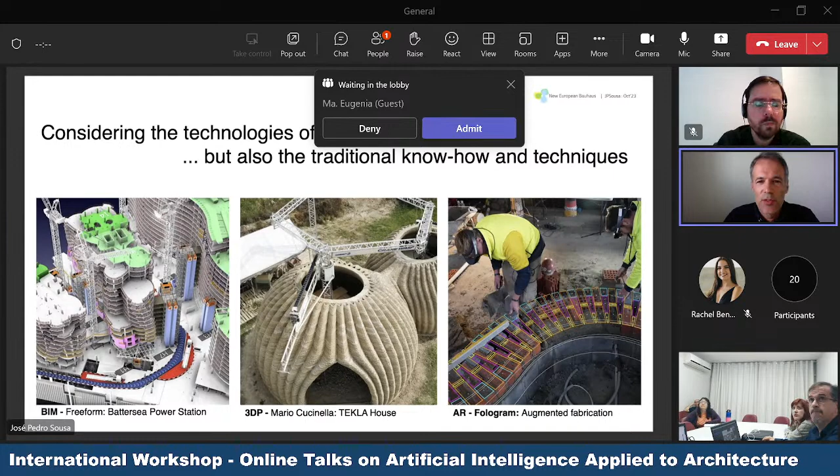Looking into how this school, founded almost 100 years ago, can inspire our actions today, we can see that, like then, we should consider the technologies of our time to help us, but not just those emerging technologies. We should also look into traditional know-how and traditional techniques and find efficient ways to combine them.

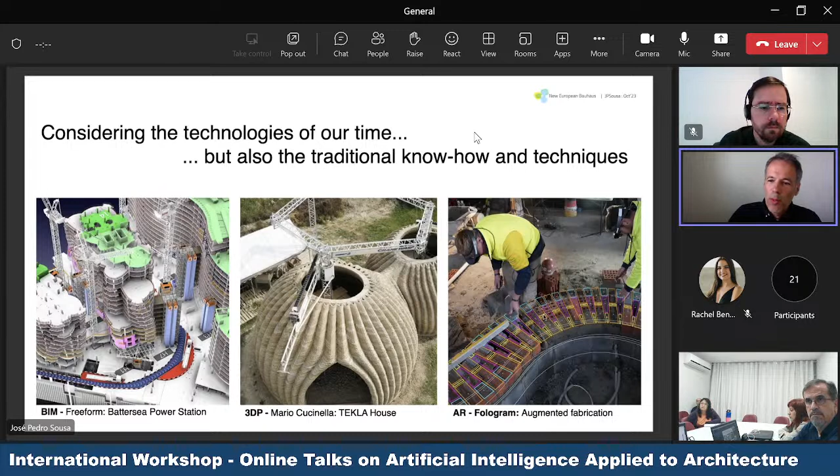Today we have building information modeling, reframing collaboration in our industry. We have technologies like 3D printing that allow us to use only the material needed to produce these kinds of structures. We also have augmented reality technologies where we can expand manual and traditional crafts into more complex and flexible conditions.

There are also other technologies here today to be learned, explored, and examined, and those are part of the workshops that Igor is running. That's artificial intelligence, and we see artificial intelligence used to think about ideas, but also to consider and evaluate a myriad of possibilities when designing our buildings, following different criteria that can be environmental, economic, etc.

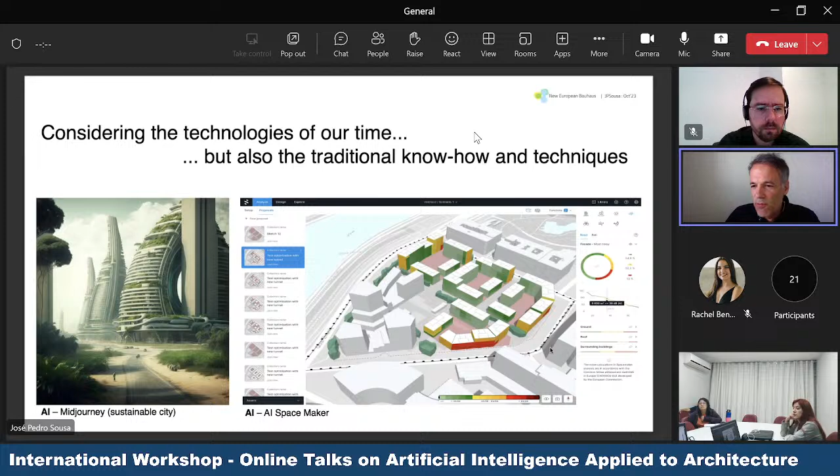Unlike in the Bauhaus time, when the new materials were concrete, steel, and glass, and the new architecture was meant to be made out of those materials, today our path is radically different. We should avoid those kinds of materials because their ecological footprint is very negative, as I showed before with concrete. So we should prioritize materials that already exist, that are natural or biological, or smart materials that can respond intelligently and efficiently to different environmental conditions. This is the importance of materials and the trends we should follow nowadays.

A building got an addition that introduced better life quality. So instead of demolishing it and producing a new building, which would of course cause a large amount of CO2 emissions, with this smaller intervention the building could get a new use. It could envision a new lifespan for its inhabitants.

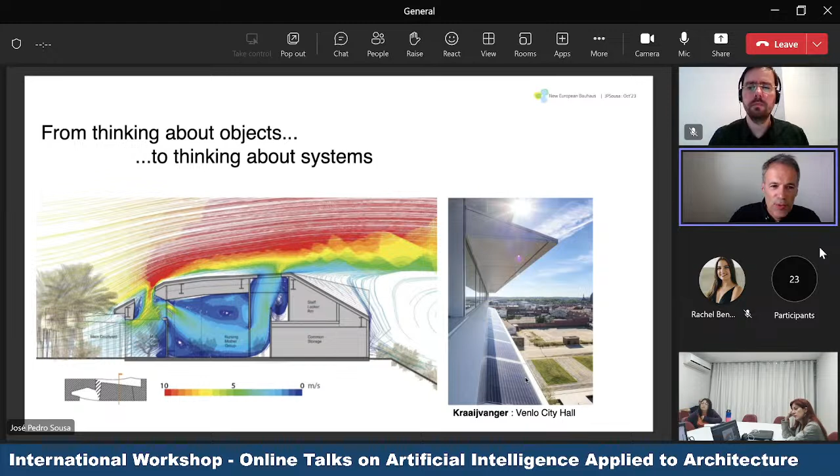When we look at this picture, we see these shading devices that block light from entering directly inside the spaces, in the interiors. But at the same time, on top they have solar panels that can capture sunlight and transform it into electrical energy. This kind of relationship between our buildings and the environment is something that should be strengthened and further explored.

But it's not just about thinking about systems. Maybe we could also think about more-than-human ecosystems. So this change doesn't concern just human beings, but also the biodiversity that inhabits our planet.

So the idea that our buildings don't just concern their human inhabitants, but can also foster the biodiversity around them and be positive for biodiversity, is also something one should consider when designing.

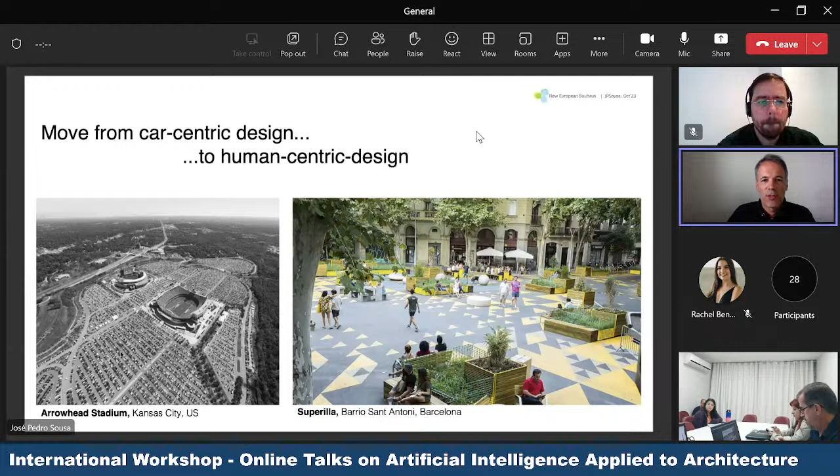Here we see an example in Barcelona. If you visit Barcelona these days, you'll see construction work taking place because they are creating this grid of streets dedicated to pedestrians, and also planting trees and vegetation to foster the meeting of people and a more sustainable and healthy way of living in the city. So the grid is being transformed along some axes to promote this kind of urban experience, not the one on the left. This is something also to consider.

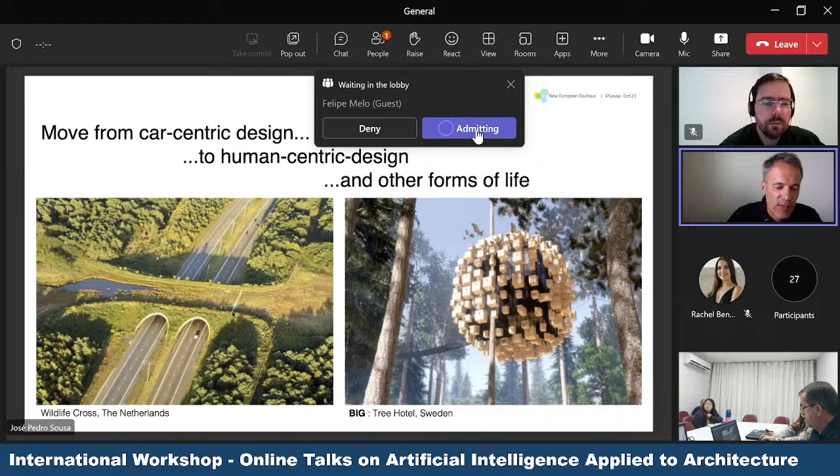We talk a lot about human-centric design, but we should aim at thinking in broader terms and think about other forms of life too. When we see on the left this bridge over the highway, it's not made for people. It was made to allow animals to cross the highway from one side to the other, to protect and enhance biodiversity in the area. So we should think also beyond human beings.

Here is a small project by Bjarke Ingels again. It's a hotel in Sweden where the rooms are covered with boxes that are actually houses for birds. These elements are connected with nature, but at the same time they foster the natural environment and biodiversity around it. This is something we should have the ambition to aim at.

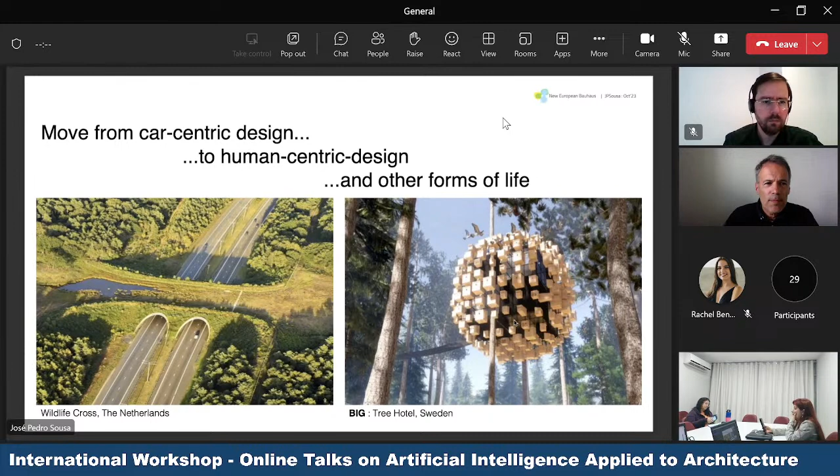Vicente Guallart also connects these two conditions, saying that the future of cities is the future of forests. In other words, it doesn't matter for us to build and build more if we don't also care about the natural environment, because this will take us to the catastrophe I was talking about in the beginning. So we must care about nature, care about our forests, and find ways to connect them in a positive alliance.

And so, trying to do that, we read in the newspaper and see a lot of concepts and ideas that are eco, that are green, that are smart.

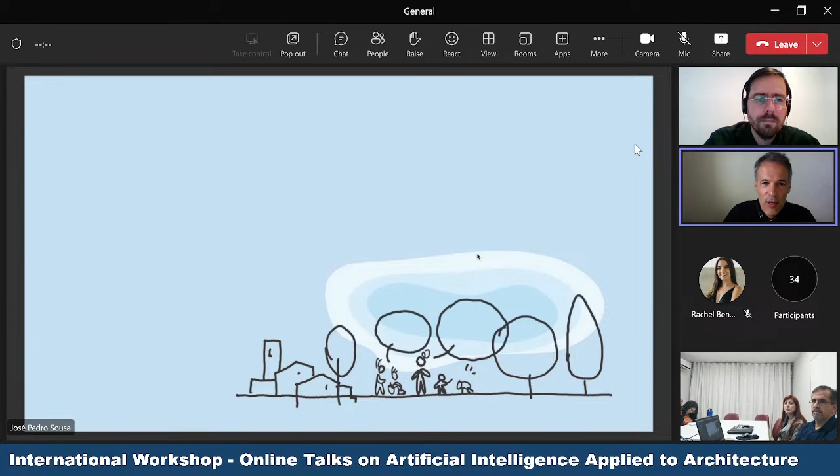So, I hope with these few projects and actions to have transmitted an idea of the landscape of different initiatives that are taking place, and I hope everyone can participate and can check them out.

And again, this is not a change that just needs to take place in Europe. We know that if Europe becomes much greener, it's nice, but it won't solve the planetary crisis. So I hope this can inspire other regions, but also that we can learn from how other regions react to this climate emergency, so the planet altogether can respond collectively to assure that our future is sustainable and livable.

So thank you very much for your attention.

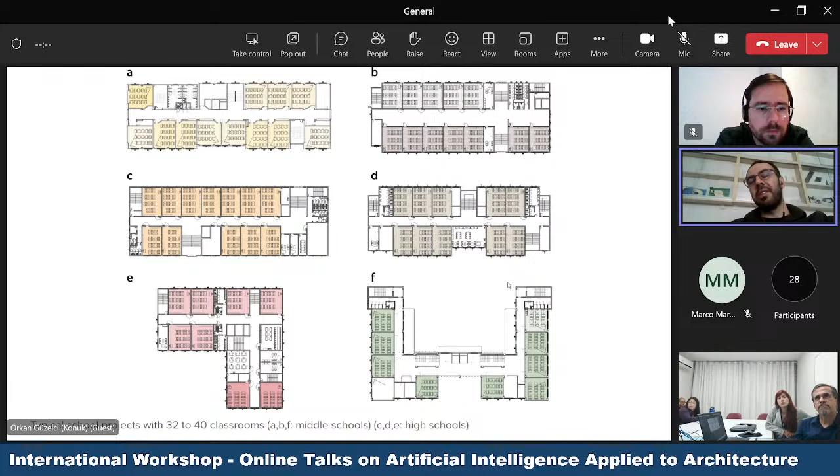These are our data sets. The first data set is from footprint to zones, and the second is from zones to furniture. So we have two different data sets. Together we checked a lot of typical projects from Turkey, from the Ministry of Education. These are public information that you can reach, and we prepared this data set.

If you can see, most of them are familiar with small differences — small interventions, but generally they all have similar elements. With the pix2pix algorithm, we started to train the model. We give this empty model and the zoning as a target.

You can see from the 10th epoch — epoch means the iteration. So if you train the model with the same data set multiple times, you have to use all the training material once to complete one epoch. After about the 170th epoch, we are starting to get results almost the same as the target floor plan layout.

Here, the teacher desk, student desk, lockers, and board — we have these things in different colors to introduce them to the computer. We use very ugly, contrasting colors because the computer has to understand and make things very distinctive from each other. Otherwise there might be confusion just because of the color.

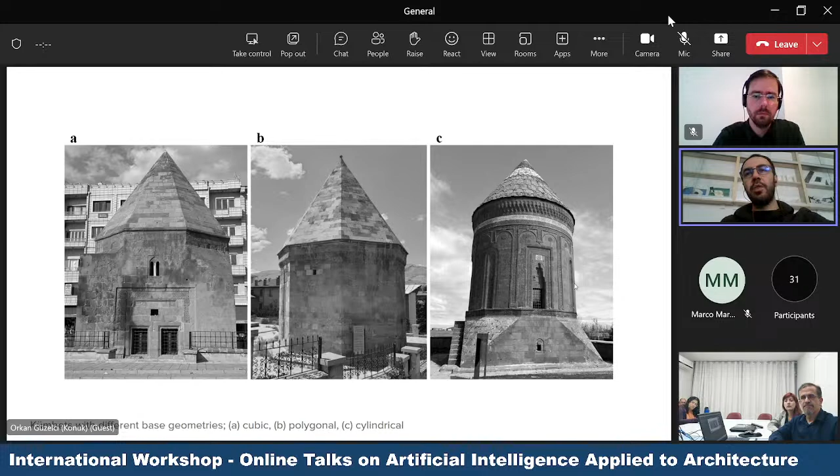The first one is cubic based. The second one is polygonal based, which are mostly octagonal, and the third one is cylindrical ones. When we check the written and visual literature, we know that the biggest problem about Kümbets is missing caps, the roofing system.

According to lack of renovation or other things like earthquakes, etc., the first part that collapses is the roof part. And in Turkey, we have, I think, 58 Kümbets distributed across Anatolia.

And after the 14th century, there are no more Kümbets built. Even when one is built later, it is not in the same style or originality level as the Selçuk Empire ones. So first, I collected all of this data from the sources, and this is the cap part.

There's a drum. This part is a kind of transition element from the main wall to the roofing system. There is the prayer room, and there is the crypt. And the thing is, from the interior it is a dome, and from the exterior it is a pointed roof, like a conical roof.

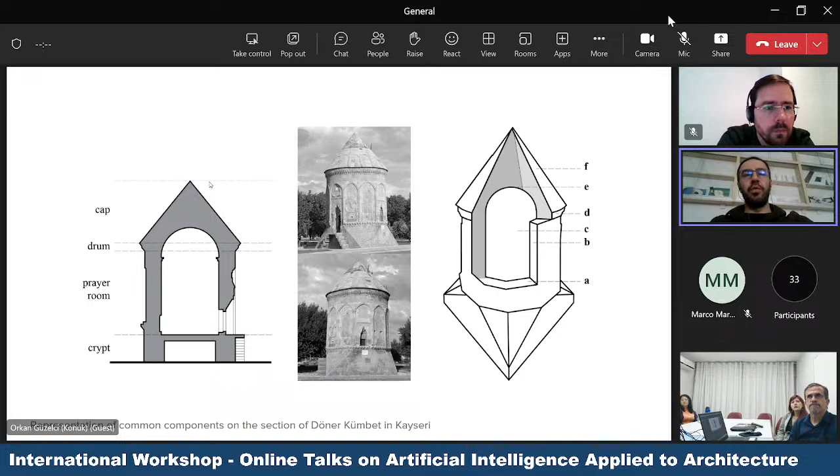When I checked the Kümbets from different sources, this is a drawing of the same Kümbet, but you can see there are different section drawings done for the same Kümbet. The reason is they were done in different time periods. For example, Gabriel was in Turkey in the 1930s, and he made these drawings during excursions. He wasn't assigned for a detailed survey job, he was there doing his own research, so it's not perfect. This one is from 69, and this one is from 86. All different things.

And that comes with the question: what if we lost a part of the Kümbet, and which drawing or which source should we follow? There were no answers to that. So that's why I said maybe I can train the model with all the Kümbets.

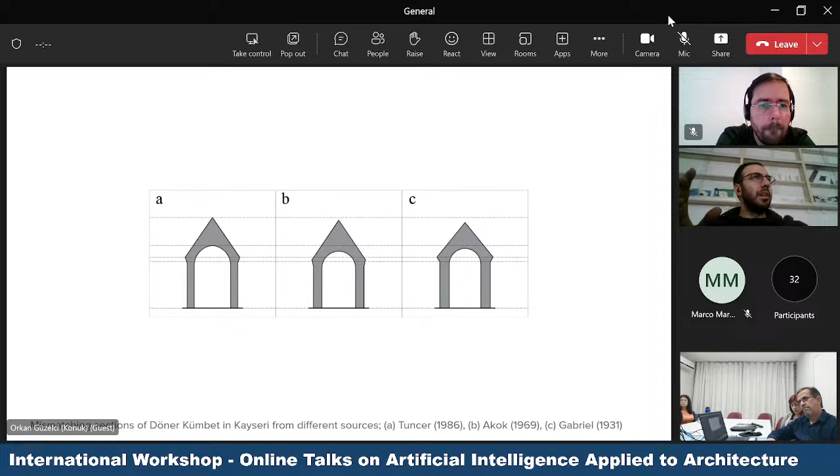So the machine learning model can learn the technique, maybe the systematic of it, from this data objectively, not teaching it something like intuition or experience, but from the data. And can we also ask the models to complete the missing part of the Kümbet?

So this is the representative style that I developed. We have one interior space, and we also have the outer shell. For each interior space there is an outer shell, and there are more than 90 drawings I have. So these are the inputs, and these are the outputs.

I started to train the model with also pix2pix, and you see that it started learning, but it didn't come to a perfect end, because we have very limited data. In the previous study it was around 200 elements in the dataset, but here we only have 90. So we don't have a perfect result, but at least the shape and the thickness are somehow similar.

For the second phase, I found four damaged Kümbets which lost their cap and stayed with only the dome. But here it's still possible to extract the source, the interior, and we can give this interior to the model to produce the exterior. Here are the generations of that.

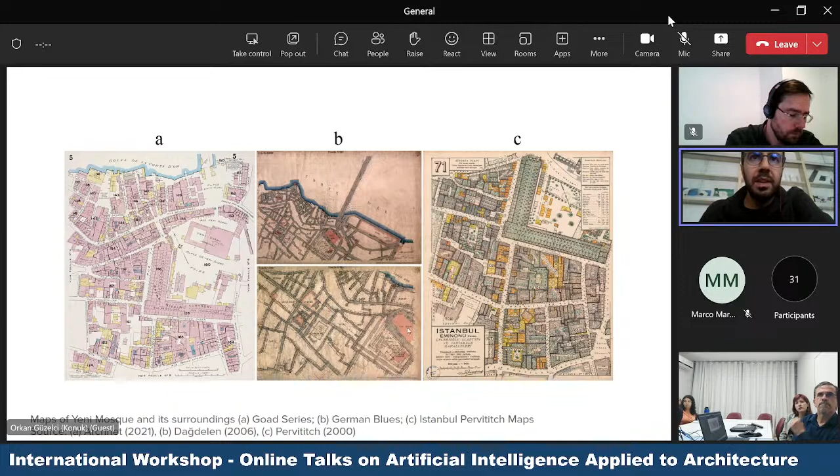So that's why they hired Pervititch to create these maps. This map has a lot of information on it, like material information, construction technique, geometrical data, and number of floors, many things. These are similar maps by Goad, called the Goad series. This is the German blues, done by Germans, and this is the Pervititch maps.

IPM means Istanbul Pervititch Maps, and SV is the satellite view. So when we merge and overlap the satellite view and the Pervititch maps,

there is no one-to-one matching on a grid. They are distributed all over the historical peninsula of Istanbul, because some parts are overlapping. There are no right angles.

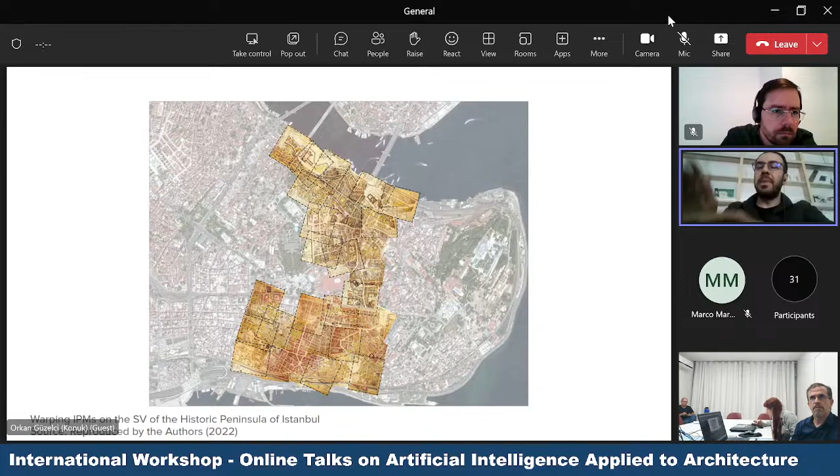So for this one, we couldn't use a pix2pix algorithm because we don't have this one-to-one mapping. Also, Pervititch started to create these maps in the 1920s and ended around 1944-45, so there was a 20-year time span.

During that time, for example, this zone here, you can see it was like a cemetery, but then it became an urban area with many buildings. So that was another issue.

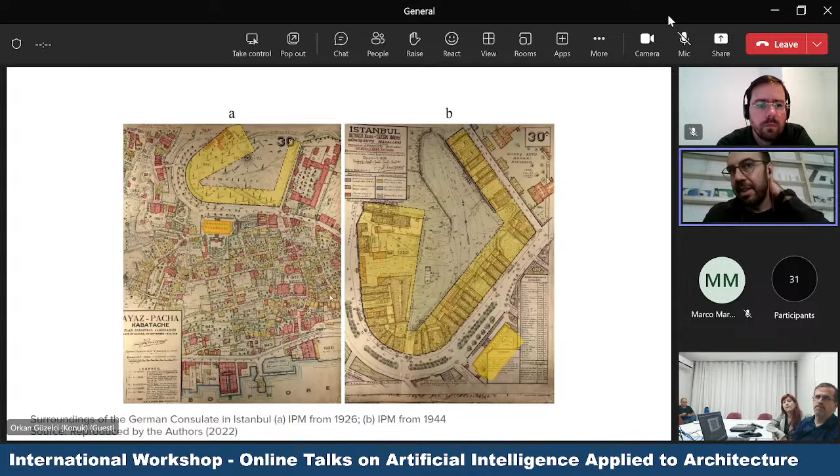Normally the algorithms, like pix2pix algorithm, work with paired images that I showed, input and output, and give the same info. It's in the same orientation, same size, same square.

But in this work, we used the CycleGAN algorithm, which works with unpaired data. So we can collect all heritage maps in one folder, and the satellite views in another folder, which can be used for training.

We also tried to make some trials on how we can overlap these two. Can we parse it, etc.

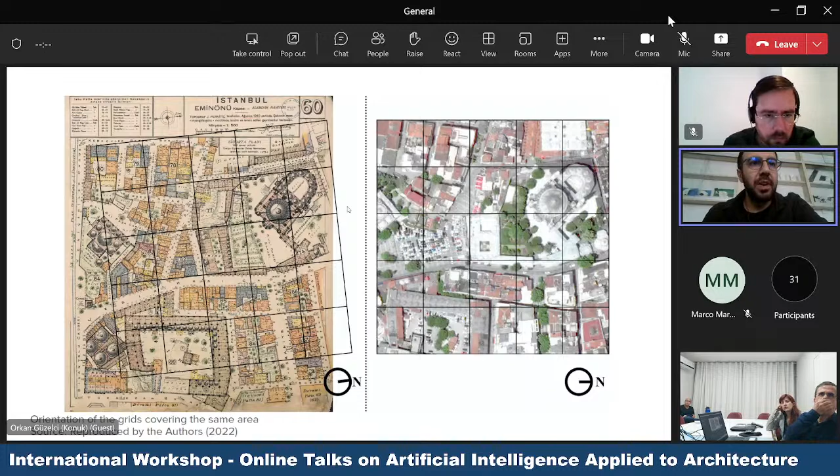After the training, you can see some results here. For example, these are the training data, but here you can see there is a church. The church is given in blue, and on our current Google map, the church is also colored blue.

Also here, you can see that we have the satellite view, but it's colored as heritage maps, and this is vice versa.

For example, here on the heritage maps, sorry, in the satellite view, you can see that the string information written here is transferred to the satellite view, and the house partitions are also transferred to it.

You can see some other details here too. For example, these are the inputs and these are the generations. And we tried for a bigger portion of the map, and these are the results.

We had some difficulties. We were able to transfer green areas, construction techniques and materials, and we could also transfer labels.

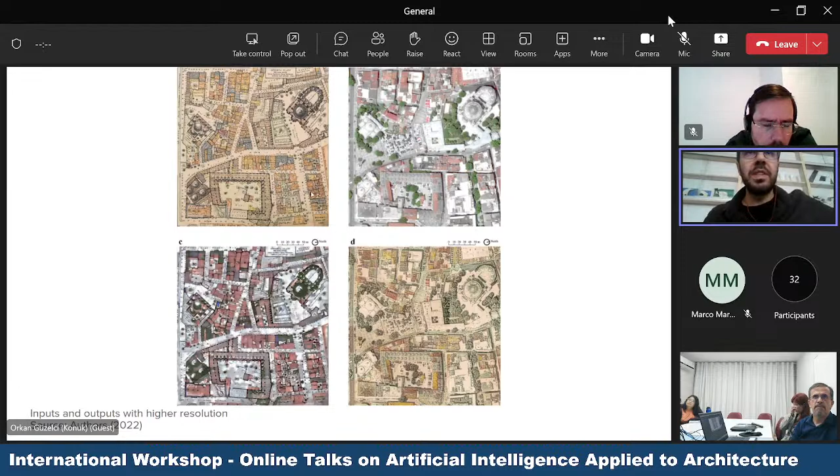So if you think of this as an A4 paper, there's very small data on it, not really visible, but here the things are visible and readable. So the dataset was really mixed, with materials of different qualities, both in content and in representation.

Yeah, so this was the third study that I wanted to share.

The fourth study is with Barış, Sema, and Hanna, and it's called synthetic abstracts. Here we try to use the language models of AI to create some abstracts, let's say an academic abstract, like a summary of a paper. And for that, what we did—sorry, that was originally in Turkish, I don't have the original, so I'm going to translate.

So first, in the first dataset, we had the abstracts of the conference papers from a single conference, which is a national computational design conference in Turkey.

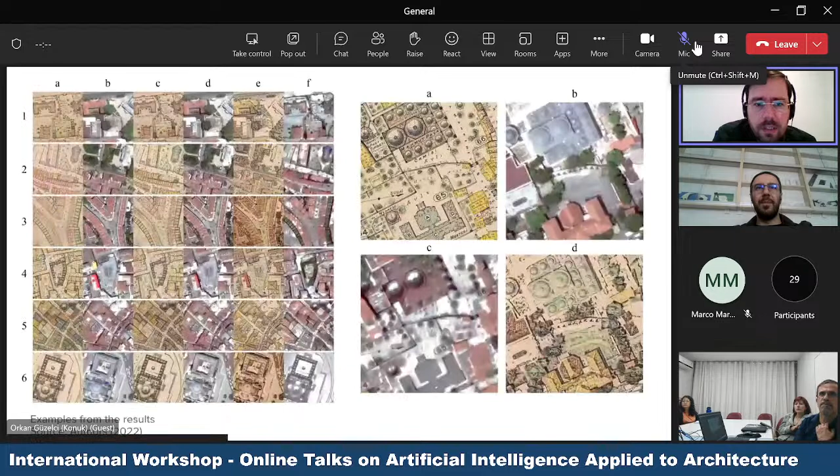Very nice, amazing. I was surprised a little bit also with the training of GPT. I haven't read your papers about it, but I'm always curious about how to train a model with a custom dataset, because the papers I read about GPT always use available online datasets, but you are using a custom one, like from a university repository. How did you manage to get these tags and train the models in an operative way?

I know that our colleagues who trained the model get the info from the CumInCAD dataset. The CumInCAD database is organized as a database, so it was okay, there were some ways to get it. But here we have to follow everything manually. That's one thing. So we have to download everything and merge all data in a single document. We have to put some marks between each abstract, and then we count those marks to divide them. It was mostly manual work for data gathering.

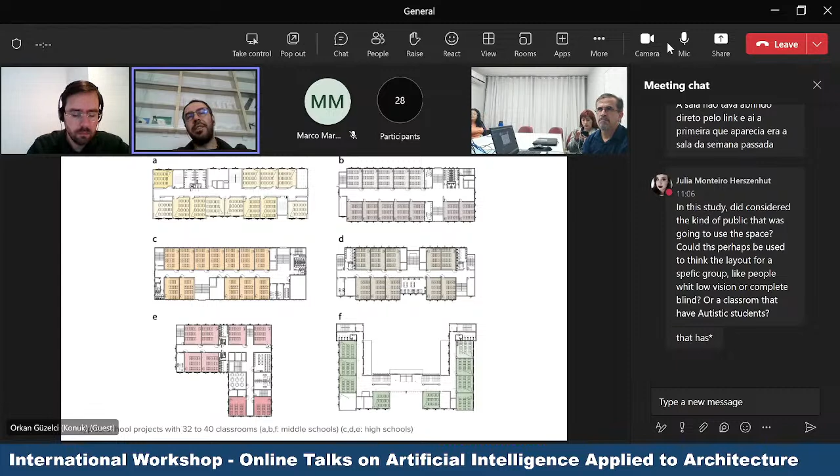I was thinking, can we make two different inputs, for example? We could make inputs, one with a door of 1 meter and one with 150 centimeters, and the door width, for example, here as an input would create new solutions.

For example, we could have two data sets - one for disabled person regulations, orientations and other things, and the regular kind of classroom. So we could have a mixed data set but with different door widths, and according to the input, we could have the correct or appropriate output. So it's an option. But for this case, since we don't have many classroom layouts for disabled persons, we would have to design a lot of classrooms. And if we start designing it, it means we are having a conflict with our idea of automatization.

The idea is to automate this labor-intensive job, because every time you have to copy 30 things, and that's what we are trying to avoid. But if we start to design many alternatives for autistic people or disabled people, that just makes a contradiction with the goals of the study. But it is possible, yeah.

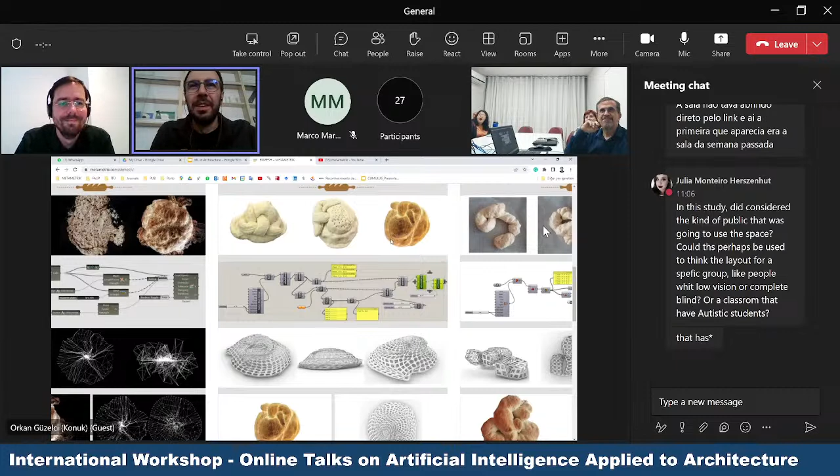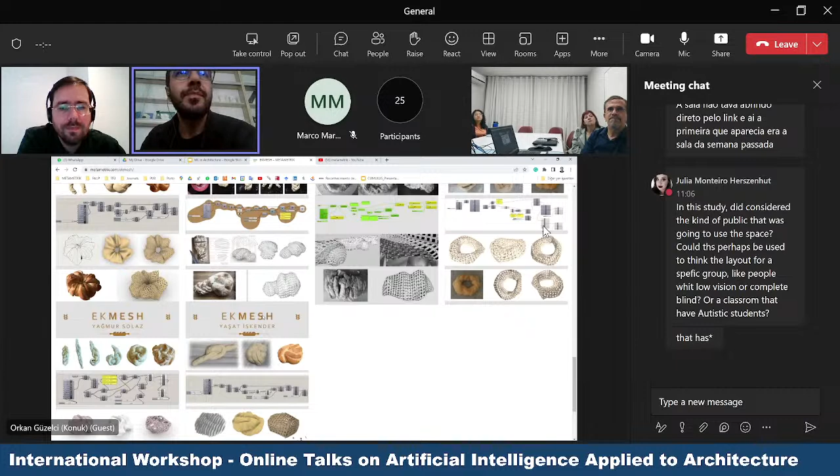So we have these forms, like modeling forms and manipulating forms - we have many. There were huge numbers of attendees, all using different techniques with very basic algorithms. What basically they were doing was merging daily life things, daily life objects, with digital tools. Igor, you see us, right? You see the content, okay.

So another one was dynamic design, called dynamic pattern. Here, there is this traditional lace work, and we asked them to create a shape rule and create this pattern again, and give these shape rules to the second person. So the first person makes this analysis and gives it to the second person, and the second person codes it in Grasshopper and creates this kind of 3D shape with Kangaroo.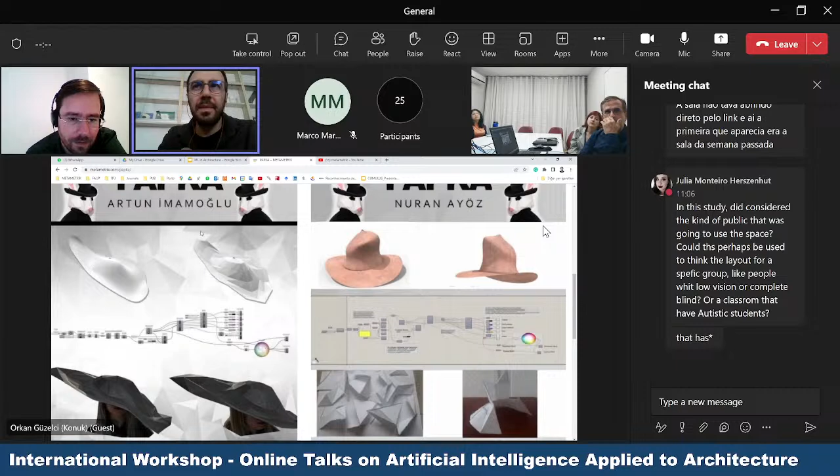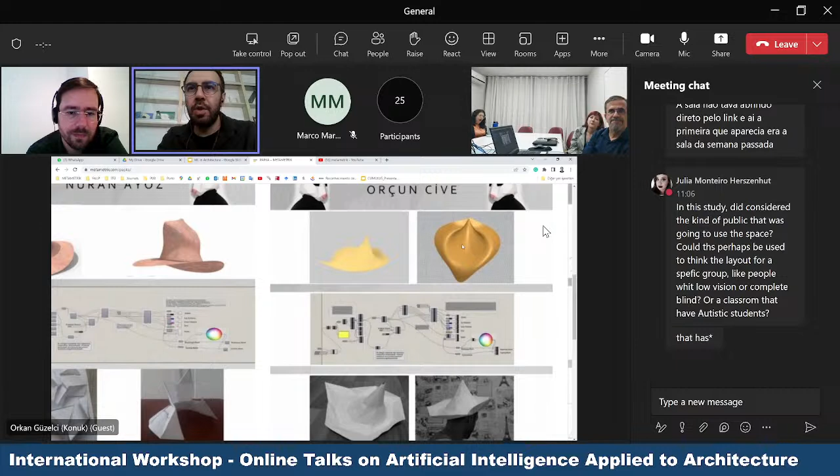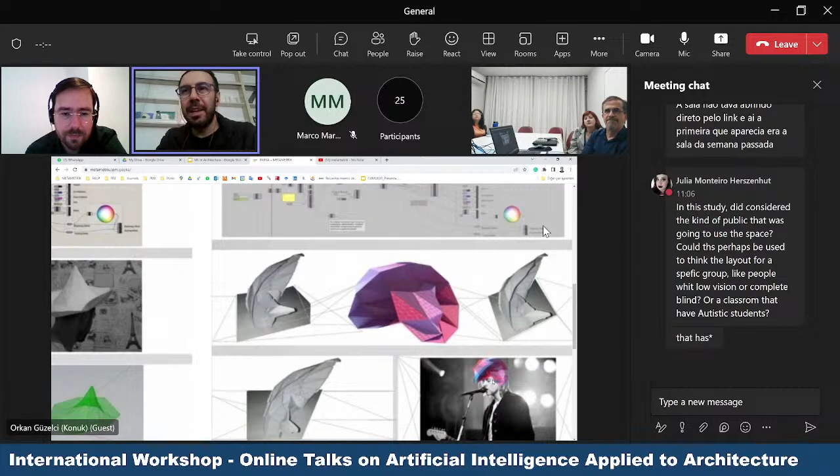For example, this is the curvy shape, but this is the folded and unfolded version of it. You can do this form with 3 lines and 1 loft surface - the loft command. This is another hat. And the nice thing is they also make this kind of photo montage - for example, this one is from a Harry Potter kind of thing. Here there's a folded one.

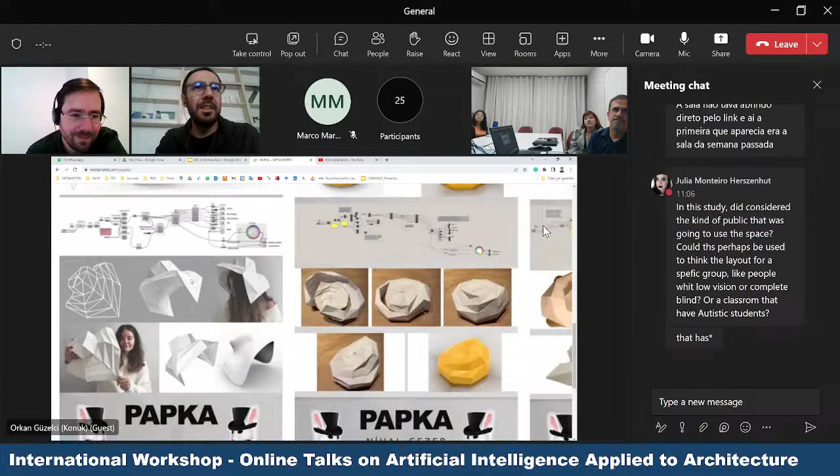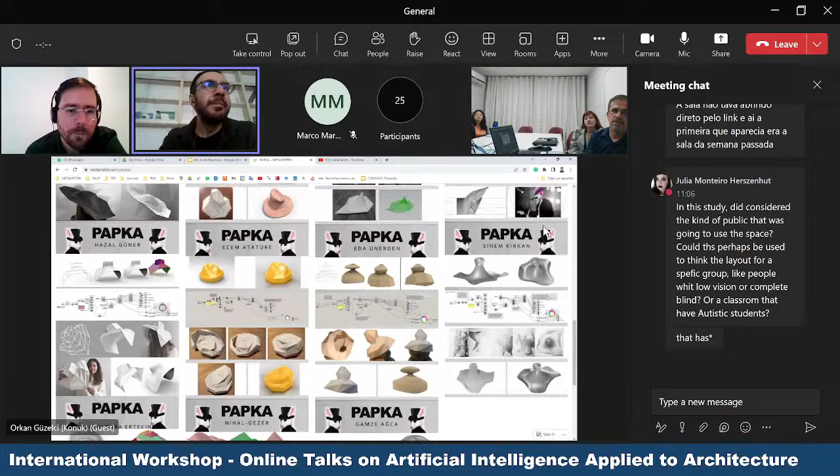They all use regular paper. From elements they rebuilt these things. Oh, I don't have the content here. Okay, yeah, and what else?

Normally everyone has an idea, but there is no place to publish it, because if you are not an expert, no one asks for your article or blog post. So here there were some blog posts written by students, and many things prepared not only by our students but by a general audience. And also we had some videos.

Maybe it's better to show from YouTube. We started having weekly guests who talk about design, art, and technology, and we continue those meetings since we started. So we're having our 137th guest this week.

The thing is, all of them are in Turkish, but there is a huge amount of knowledge there. We also have videos that we show: how to use DALL-E, machine learning, artificial intelligence applications in design, this one with Grasshopper and digital fabrication. It's a series - how to use Midjourney, how to use Autodesk 3ds Max, basic exercises with Rhino, terrain modeling, Lunchbox, and many things.